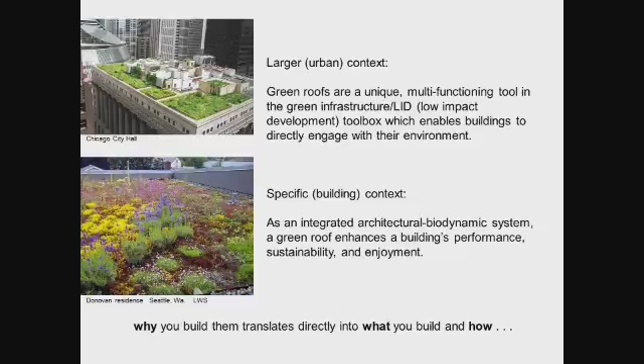It's a living sponge. It's filtering, it's sequestering, it's doing all those things, it's creating a little environment, and you obviously have to protect the architectural underside. So that's what makes it a little bit more of a complex creature.

So what is a green roof? Just really quickly, these why and what portions of the talk are meant to go through relatively quickly. They call them green arts and gray arts, and there's a distinction there that people need to be aware of. So all these things that are listed here are things I'll talk about.

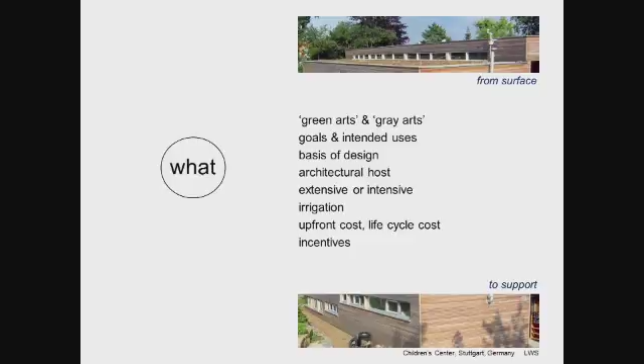And just as an aside here, the image that you're seeing of the building, top and bottom, is from Stuttgart. Germany is very advanced in their mandate to have green. I think Stuttgart is one of the cities that mandates green roofs on all public buildings. So they're doing a lot there.

Okay, because I was sort of led to know that handouts would be available and that some people can't make this, I thought, okay, I'm just going to spill it all out on paper here. So I'm going to be taking directly off my presentation here. It's a little bit text heavy.

So, integrated system, but distinct disciplines and scopes of work. You need to get the roof right. It needs to be well detailed, well draining, and leak proof, and that can't be underscored enough. You really need to get that right, because as soon as you have a leaky roof, and leaky roofs happen with or without green roofs on them, it casts a pall on green roofs in general, which isn't quite fair. It's just much harder to take off all the stuff that a green roof is in order to get underneath to fix it than it would be for an ordinary roof.

So the waterproofing layer is typically a TPO, PVC, a membrane roof of various kinds. The Lady Bird Johnson Wildflower Center likes to use an elastomeric, a seamless one. I'll talk about that a little more later. And then what are some of the other gray elements that are needed because of the green ones? You've got an edging system, an edging barrier, a retainer, pavers, borders, an irrigation system, monitoring equipment. So there's some other stuff up there, depending, that you have to accommodate for.

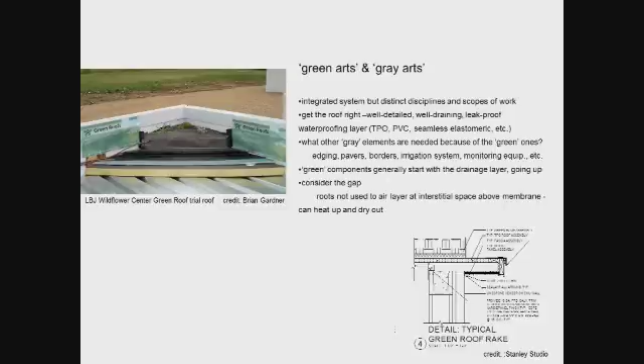Why is a green roof desired specifically? What are its purposes? What makes an owner want to do a green roof? There's a lot of things to consider there. A green roof is a green roof at the end of the day, but you might want a more vigorous water environment up there, a richer environment which takes more water and more inputs. So is there an emphasis on low inputs? You really don't want to put much in over time as well as initially, for cost reasons? Or do you want a little bit more performance? You sort of dial them one way or the other.

Is the emphasis on common good, the wider urban picture, urban heat island mitigation? Or is it more private benefit: thermal insulation, sound insulation, amenity? What kind and how much access? Are you going to use it as an amenity? Is it going to be a deck? Do you want to go up there? Do you only go up there for maintenance?

Two approaches: less is more and more is more. Both are valid options. The low input scenario has less resource use, less cost, less performance. The high input scenario is more of all that, and you get more performance. As I'll go into later, I really don't think the high input scenario is bad because of more resource use, including water. There are other considerations that come into play. What's your water source is the big one. Can you do it so that you're not drawing off the city supply? So you establish goals before moving to design.

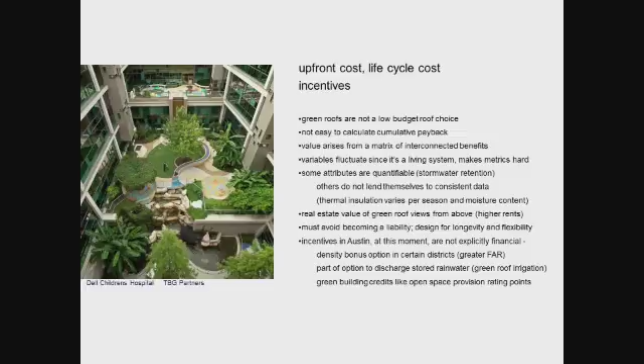And then it's part of an option, this is more recent, to discharge stored rainwater by using that stored rainwater instead of just discharging it so that it's empty. I think it's a 48-hour period. You irrigate the green roof, so it's sort of a loop. The green roof is a part in that system. And then there's just open space credits, green building rating points. So not a whole lot has been developed yet compared to other cities.

Okay, so the how, what I wanted to focus a little bit more on, and this is where pepper me with questions if you'd like to. You've got to realize that you need a team that's pretty wide. There are a lot of different players. It's all coming down to one very distinct, specific layer, as opposed to an entire building site. It's a very distilled kind of a place that you're doing green roof on, an area.

So you can use a proprietary system, American Hydrotech, where they have a proprietary growing media, and they've got plant specialists and botanists and horticulturalists, and they'll tell you, well, in your zone, you're going to want blah, blah, blah. I haven't worked with them, I'm sure you get a little bit of say in your plant choice, but they give you a package or a product where you don't have to think too much about it if you're not as educated about what green roofs are, and you pay for that. Monolithic versus modular, all these different things I will go into.

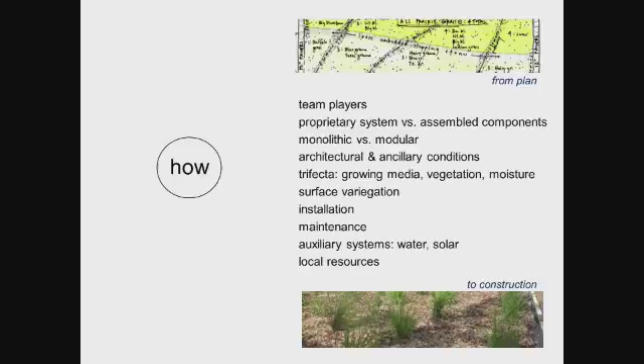So your team does include an owner, may include an architect, a landscape architect, or a consultant, designer. Definitely structural engineer. Green roof professional is a designation that was come up with maybe 5 years ago. There are some in town here, and I'm not one of them, so I can't speak much to exactly what they do. Roofing consultant, irrigation consultant, general contractor, and all the suppliers, the plant grower.

And then it's my feeling that an architect, since we're tasked with bringing together a lot of different disciplines, is well suited for doing the same on a green roof, getting the waterproofing layer really bomb-proof and coordinating. A lot of what an architect does is just coordinate and make sure the right people are getting together and talking at the right time, which you really need to do.

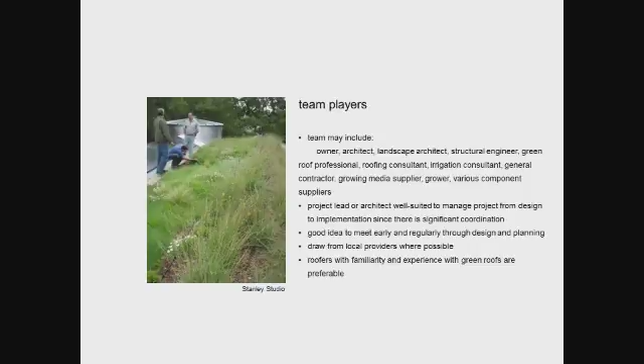So you want to meet early and you want to meet regularly through the design and planning process. There are a lot of things that might come up that might tweak things. You might find that, hey, we want to go a little bit deeper with this system, maybe 8 to 9 inches instead of a 4 to 5 inch roof. Draw from local providers where possible. That's my value judgment. Roofers with familiarity and experience with green roofs are preferable. There are a few in town that we know are not scared. They can deal with it.

So proprietary system versus assembled components, there's pros and cons to each one. One is a full package. You might need that. One is more of a DIY approach where you're bringing all these components together yourself. A little harder. How is local expertise figured into either one of those?

Again, with an American Hydrotech example, I'm just picking them. I don't know how it works, I haven't worked with them, but they probably have some meetings where you sit down and you kind of understand what some of the variables are that you could tweak and make some selections with their input.

How are regional materials included? Local materials. The Wildflower Center, I believe, has used crushed brick as a structural component, rather than lava rock, which comes from more or less New Mexico, I think is the closest place you can get it. That's where we got ours. Maybe there's another supply that's closer at this point. Shale, expanded shale is another one. I think that can come from the northern Texas area.

Access to knowledge. This is kind of another allusion to proprietary systems where you're not always told, you're not allowed to know what's in their growing media. It's a patented thing. It's kind of secret, which is weird to me. But you want to know the nuts and bolts of the system components, from the point of view of, over time, if something's not working quite right or you want to dial something up and something down, you know what you have to work with from the start so you can do something in a more informed way.

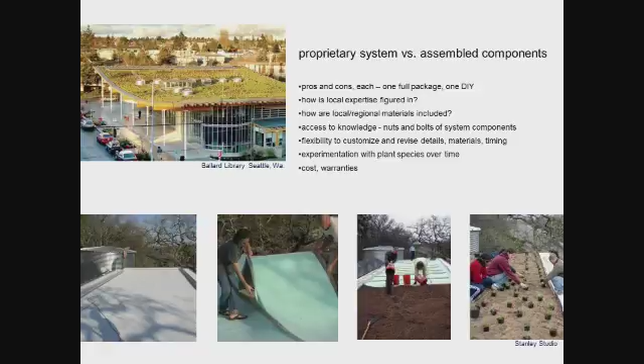So that is the Ballard roof. It's beautiful. I think it's American Hydrotech. Ballard Library, in Seattle. It's a really nice building. And then below is our own roof that we did, 2008 to 9, in East Austin.

Monolithic versus modular. I have a preferred leaning on this as well, which is monolithic. The monolithic is like a blanket. It's a continuous thing, and it shares moisture and microbes and fungi and nutrients and root space. It's a whole system that can share that, as opposed to separated component systems. But you have to get all the growing media up there, and then the plants up there, versus a system like LiveRoof that has more of a modular system of trays.

In this case, LiveRoof has, you see the white there, you can pull those out, and I think they're trying to split the difference a little. They're trying to make it a tray, but not with walls that go all the way up. They're trying to remove part of the walls to begin to migrate some of that growing media and plant material across that boundary of the plastic wall.

And the understanding with these is that if there's a leak or a problem or you want to change something, you can go right to it if you've got a leak detection system and take out that tray and remove it. I think in practice, it's actually kind of hard to do that. But, again, I don't have too much experience with this. It's just what I've been hearing.

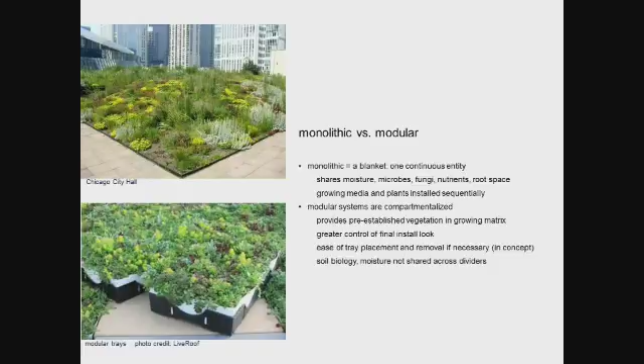How many green roofs are there in downtown Austin? Not many. Under 5. You're sitting in one of them. The Austonian has a deck. It's an amenity deck with a pool that uses HVAC condensate. Some of the green roof activity in Austin in terms of identifying and keeping track of these things has kind of fallen off recently in terms of keeping up with what's being built.

What time do we have here? I don't know where I am right now, how much I'm talking or not. Time. Okay, all right. I'm sorry. That's okay, no problem. You had the 20-minute and the 5-minute, so. It's only 10:15, so you still have another half an hour. Okay. Lots of time for questions.

So some of these other architectural and ancillary conditions are things to think about. Your roof slope, you definitely want it to be a well-draining roof. So even with a flat roof, which is never perfectly flat, 1/4 inch per foot is the understood acceptable flat roof drainage slope. When I was in Seattle doing a roof, I was talking with some people up there who really thought that you should make it more than that. 1/4 inch is probably not enough.

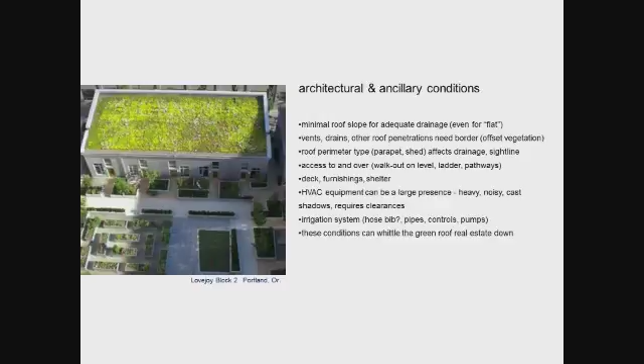These three things, the growing media, the vegetation and the moisture, are all really intricately related. So you need to think about how they will interact. You're not going to know everything going into it. You can get the benefit of a lot of built examples out there and talk to people, but in the end, you're not exactly sure, given your environment and location, exactly what's going to happen, but you can give it your best shot. The roof will figure that out as it continues. So the baseline concern within these three things is keeping the plants alive, healthy and flourishing. That's the bottom line you're shooting for.

So you work from there. If you're going to grow tomatoes, that's not done very much, but if you are, you're looking at a much deeper system and a highly organic, heavier content soil. You're not looking at a very inorganic, shallow growing media, which can take sedum and other things like prickly pear. Those plants, prickly pear and sedum, are not going to have a lot of evapotranspiration, so they're not going to have as much of a cooling effect as other non-succulent plants. And the idea of succession: are you okay with allowing the plant regime to evolve over time?

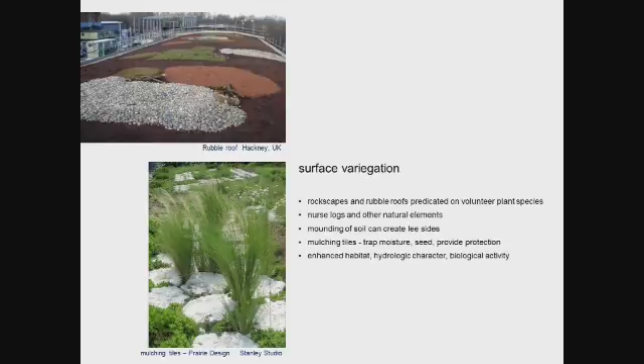The mulching tiles do a couple things. They protect the soil underneath so that while something can't grow on the tile itself, there's a lot going on underneath it. And then in the gaps between the tiles, some interesting plant seeds catch in there, and it traps moisture, and there are some interesting little mini conditions that happen.

All of this for enhanced habitat and hydrologic character, meaning a lot of different kinds of moisture content in different areas, and biological activity. So installation is kind of an exciting day.

This is another project we've been working on, and it's not completed construction yet. It's out at Mueller. It's their second amenity center, and it's north and east of the flight tower, John Gaines Park, and we're lucky enough to keep the green roof component in the design. It was on a big hiatus for a little while, this project, about 5 years. Came back up, and now it's over the hump with construction.

And the Wildflower Center also collaborated with this one, and we all decided on more of a succulent palette. So there are going to be some grasses and some herbaceous seedings of mountain pink and bluebonnet, and they'll be interspersed with what you see on the bottom left there. And it's really exciting. It looks fantastic. They probably spent a good bit of money on the plant material because there's a lot. It's planted pretty tight, and there's a lot of them, and they're pretty well established.

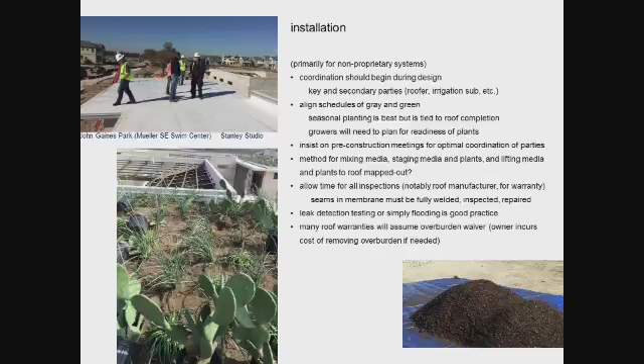So pre-con meetings are real important, we've found, because these are meetings that happen right before you begin construction. There's a lot of surprises that you don't want to have happen when everything's going up. You really want to have everybody meet each other, and get the game plan for how everything's going to be delivered onto the site and then taken up to the roof. Sometimes there's a lot of steps, because green roofs aren't done a whole lot, that people aren't aware of that need to be thought about.

So is all that mapped out, staging all the materials and lifting them? You can go all the way from the 5-gallon bucket, like hand it to the next person up, or a big bucket lift, or there's a lot of different ways, well, not a lot probably, but you need to figure out how you're going to do that. Fight gravity. Allow time for all inspections.

You really need to make sure, again, that membrane, if it's heat welded seams, you need to make sure those welds are really not going to fail. And one of the reasons why the Wildflower Center prefers an elastomeric membrane, a seamless membrane, is because they think that the roots may try to find the seams and begin to pry at them a little bit, especially if there's a little bit of an opening. What we do is we use a TPO membrane, and an inspector comes out, makes sure all the welds are well done and repaired and patched if they need to be, and then we put another layer of TPO over that. It's kind of a slip sheet.

Leak detection testing, or simply flooding, is what some roofers will do anyway, just to see if there's any leaking that's happening. And with most roof warranties, you'll get a warranty, but they will not cover it. You'll sign an overburden waiver, where you, the owner, are responsible for getting that stuff off in order to get to the leak.

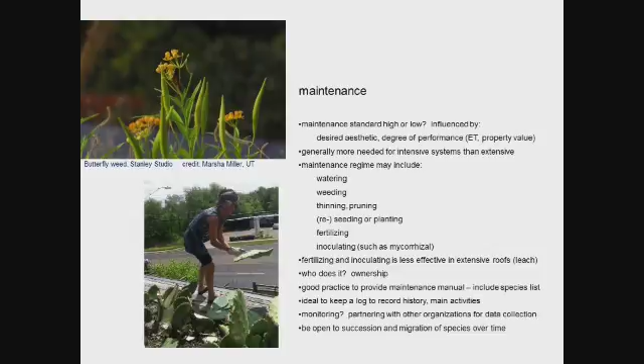And yeah, in my mind, it's something that you would do at grade on the ground with another landscape system. Those are species that you might not want on the ground because they are invasive. Mm-hmm. It might be really tough if you plant them on the roof because they're very durable. But you can have the same issue, like Japanese grasses. Yeah. Excess spreading of seeds. Right.

And some of those things have tap roots that are kind of the long ones, and they hopefully will be discouraged by the green roof situation where they just can't keep going down because there's only so much depth. Another thing that I found is leaves from trees that drop onto the green roof. That's something that I'll go through with the sedum, and I'll just kind of comb it out and deadhead some of the sedum flowers, and at the same time get a lot of the post oak leaves that are all over the place.

Yeah, maintenance. And be open to succession and migration of species over time. That's a whole huge conversation.

So this last bit, getting towards the end here, another, to me, really exciting couple of components that we were able to include in the pool project at John Gaines Park are a solar trellis that has some vine plantings on it. It's separate from the green roof and in a different location. You see it coming through the breezeway there and coming out and bending around to where the pools are, rainwater collection. And you can see a little bit of a bluish color in that cistern, perhaps.

We've got two bathhouses, and each one has a wall that we expanded to become a water wall. So it's about 2 to 3 feet wide and 16 feet long, and it holds a bladder, and it's going to take all the water discharged from those shed metal roofs that you see, and it dumps into the rainwater cistern water wall, and that water is used to irrigate the green roof. Will be in a matter of months, I hope.

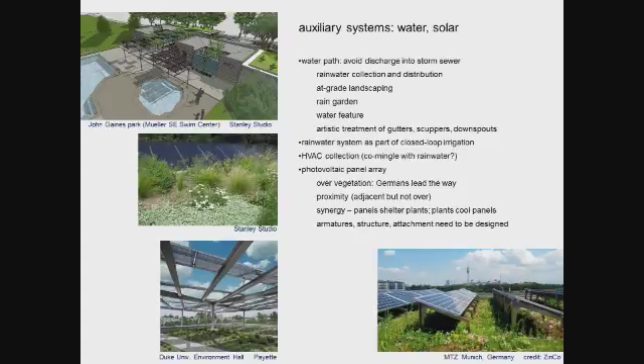Some local resources are, as mentioned, the Green Roof Advisory Group. They came up with a 5-year implementation plan, and I think we passed by the 5th year already.

Maybe 20 of these, like 5x6 white pedestal parapet roof trials, where they're trying out a conventional roof and a cool roof, which is sort of white, reflective, and a green roof to see what kinds of temperatures exist on the surface and in the soil. They have thermocouples in the soil, and then water runoff. And they're now affiliated with UT, so their capacity has deepened over the years with that. And they also have a few projects on campus. One of them is that ticket kiosk at the front, and then they have another one.

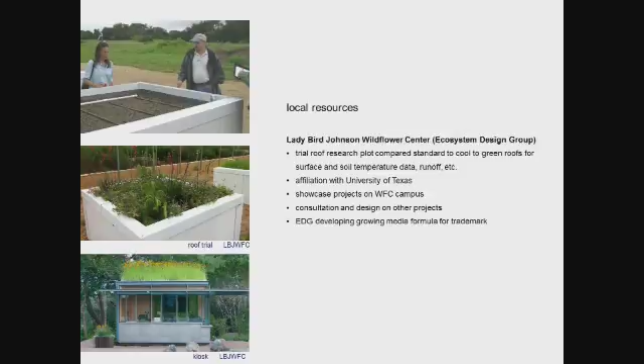Finally, Growers is an organization that I helped co-found years ago. We're not really active right now, but in the past we've had little 7x7 presentations where we've had some different projects around town come and just give a little short slideshow, and the next one comes up, kind of like a Pecha Kucha style thing, so that people could kind of mingle, and there was a keg, and it's just fun, and people just kind of learn more about green roofs. That's not happening so much anymore, but we got our nonprofit status, so hopefully we can eventually ramp that back up again.

Yes? If I have, say, a pitched roof at like a 30, 45 degree angle, am I totally out of luck in that situation, or is there some type of terracing? Everything I see in the pictures is all flat, so I'm just kind of curious about what you can do with a pitched roof. You can, and you can do them. I'm going back to that on the bottom. 1 minute. I'm going to do a lot in 1 minute, including get to Paige's question.

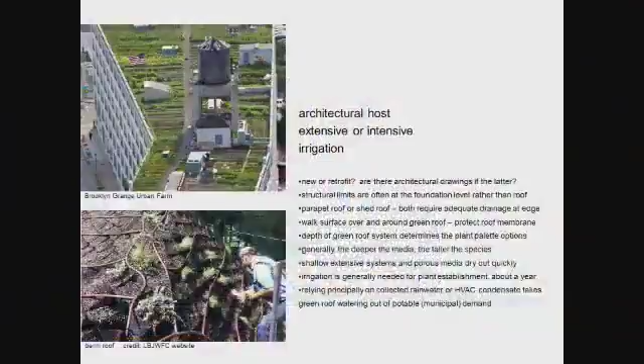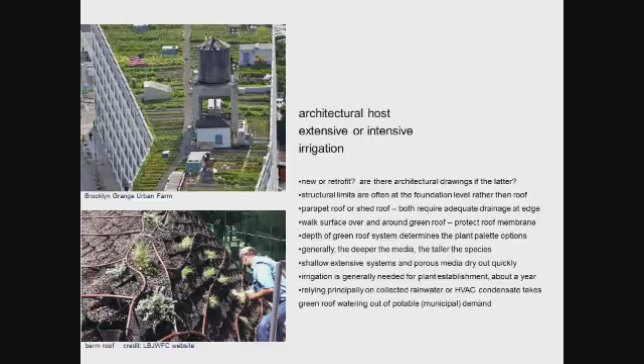You can do it. You just have to terrace it and pocket it. Yeah, and there's systems that do that. And again, I don't think there's much done. It was credited on their website, the berm roof, which is on the Lower East Side of Austin. And Wildflower Center did also have a big part in that. And you can see the erosion, I don't know what those things are called, but they hold the soil. So yeah, you should look into that.

And yeah, I think that you just need a deeper strata of soil and organic mix to grow annuals, and you have the same kind of heavy input scenario that you would have with a garden where you really have to fertilize quite a bit and add compost and everything. But it's absolutely possible. It's just a matter of weight and access. I don't know if that totally answered your question, but yeah. So I guess I'm done. Right on time. Thanks, everyone.